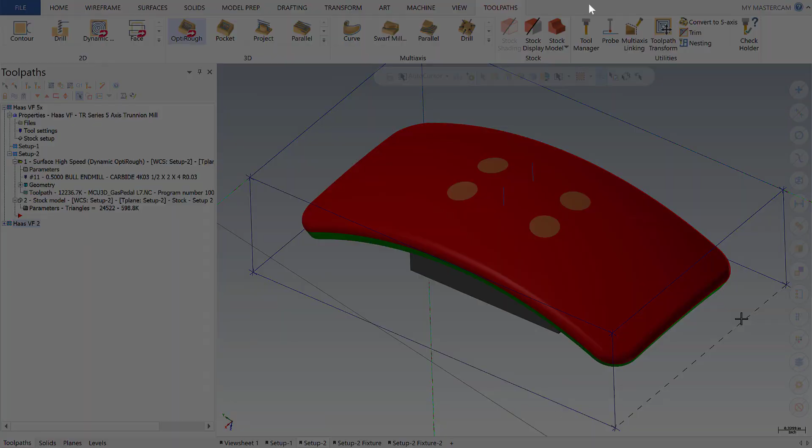So what I want to compare and contrast here is two OptiRough operations, one with step-ups disabled and the second one built with the step-ups enabled. So the first one here, let's take a look at the stock model, and this is the one that does not have step-ups enabled, and if we zoom in and look from the side, we'll see the ridges, which are the artifact of just using the step-downs.

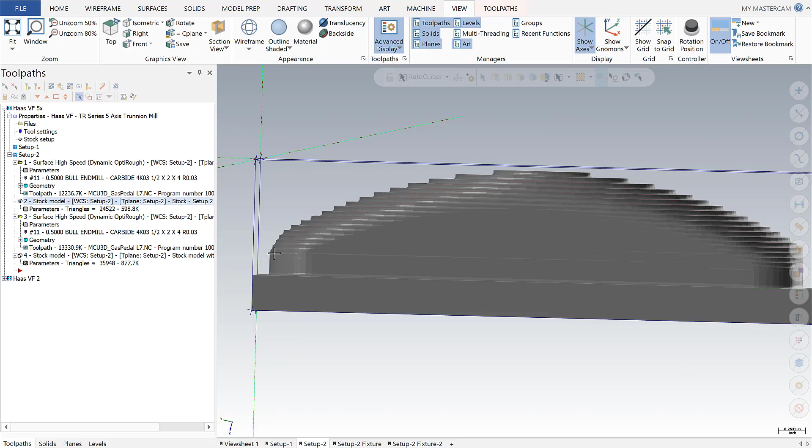And as we take a look at the second OptiRough, I want to show how this was set up from scratch. So going into parameters, we're going to make sure we had OptiRough set. In our model geometry, we selected the top area of this curved part and the outer ridge here.

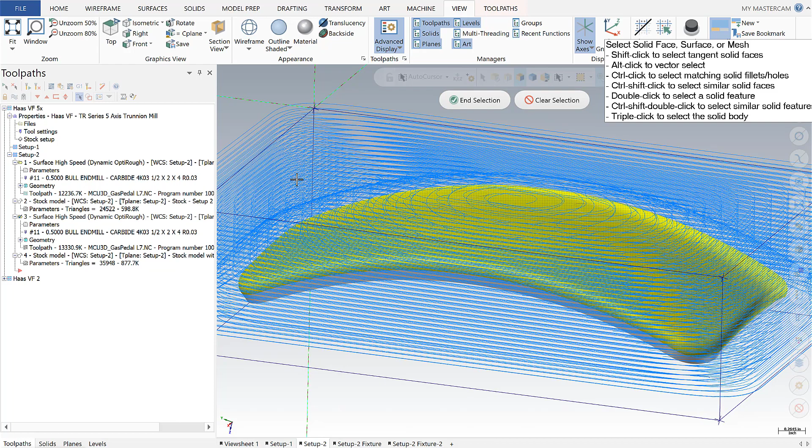Inside of Toolpath control, for the boundary chains, we wanted to make sure we set a boundary on the outer edges of this stock to make sure with the roughing op that we got all the stock and there wasn't anything left hanging off here on the sides that would cause damage or potentially cause damage for us. So we set that as the boundary chain.

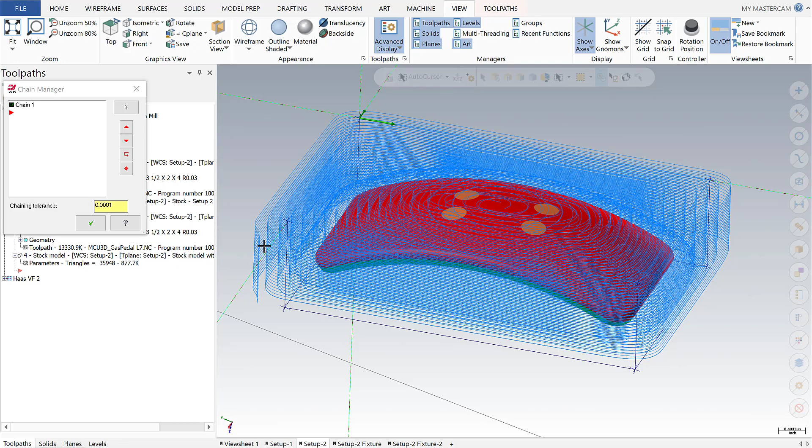For the tool, we're using a bull end mill, and a flat end mill would work just fine as well, but the bull end mill, if you have access to it, is going to give you an ability to get to a closer net shape of the part, just given the shape of the bull end mill. For the cut parameters, this is where we enabled step-ups at 5%.

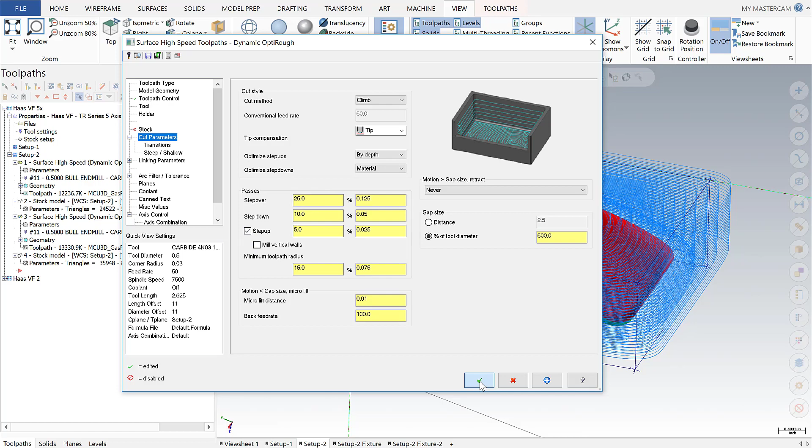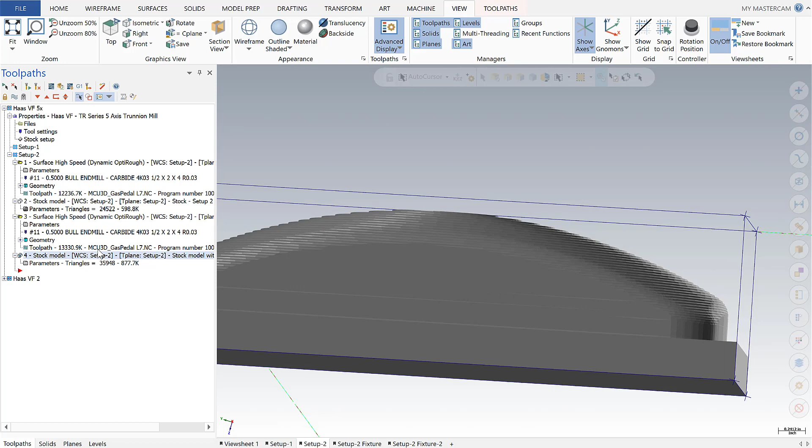And now if we look at the resulting stock model from the side, we're going to see, with a roughing operation, just compare and contrast, you're getting to a much closer net shape and you're in a really good position for finishing toolpaths. So this is going to close out our Mastercam Monday on OptiRough.